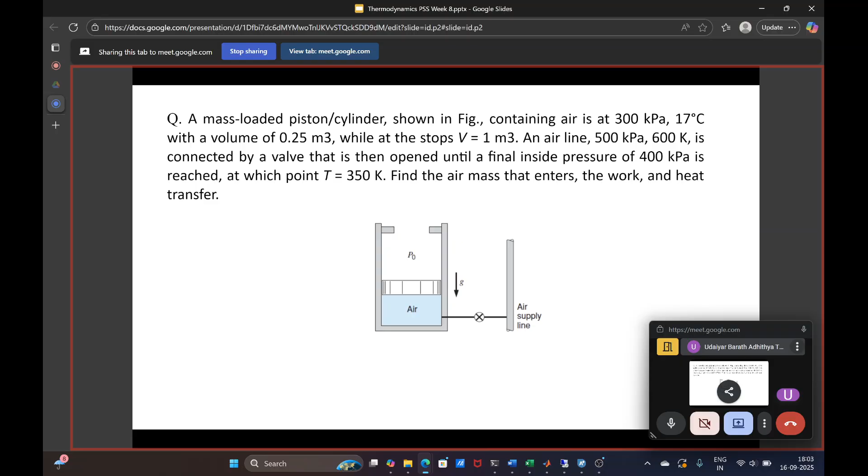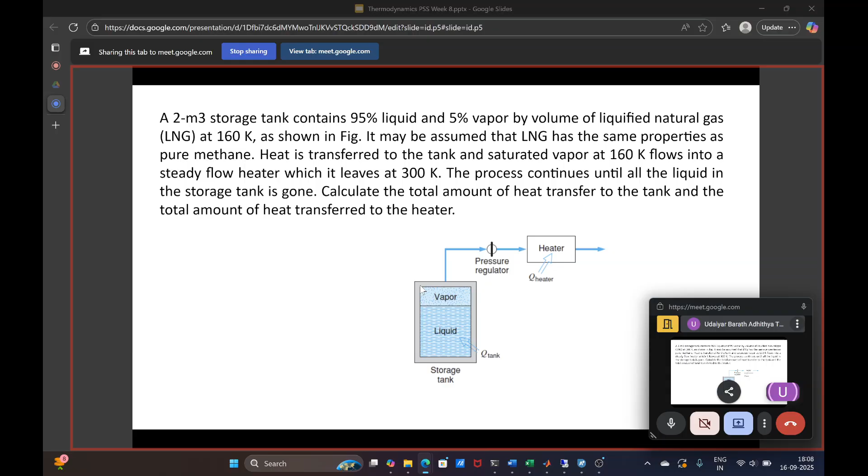And then the final mass is when it's totally saturated vapor. So the process continues until all the liquid in the storage tank is gone. That says that now the tank contains all of vapor, so the whole volume of 2 meter cube is occupied by saturated vapor LNG at 160 Kelvin.

So in that case, your mass is again 2 divided by specific volume, gives you the total mass of LNG left in the tank when it is fully occupied by vapor. That gives you 50.826 kg, so that is the final mass.

So using this, we know how much mass has exited out. So Me is 642.271 minus 50.826, which comes out to be 591.445 kilograms. So this is the amount of LNG which has evaporated and converted into saturated vapor and has left the storage tank.

So the initial internal energy is M1 U1. So initial mass we know for liquid and vapor, so the saturated liquid internal energy for liquid and saturated internal energy for vapor gives you: 639.73 is the mass of liquid present into internal energy of saturated liquid, plus mass of vapor into internal energy of saturated vapor. So that gives you the initial internal energy to be minus 67,507 kilojoule.

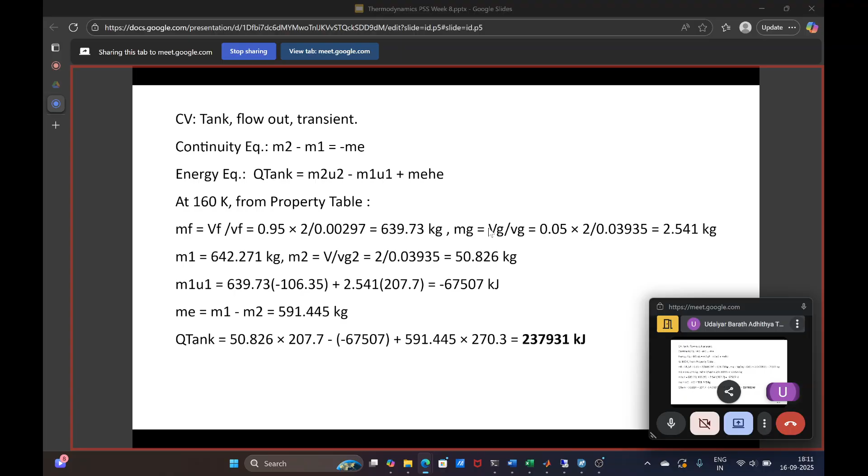So this is the pressure at which the LNG vapor, saturated vapor, is coming, and in the heater we assume there is no pressure drop, so it's a constant pressure process. So your pressure at the output also will remain the same, 1593 kilopascal, and we know that it is leaving at 300 Kelvin. So the amount of total heat supplied will be the change in enthalpy of this.

So mass into enthalpy difference, because the energy coming in is MEHI, and heat which is added with the heater equals the mass into enthalpy out. So rearranging, this is what we get: the mass of LNG leaving the tank multiplied by the enthalpy difference.

So enthalpy corresponding to 1593 kilopascal and 300 Kelvin is 612.9, and similarly 1593 kilopascal and 160 Kelvin, which is saturated vapor, is 270.3. So this gives you the heat added to be 202.629, no, 202.63 megajoules.

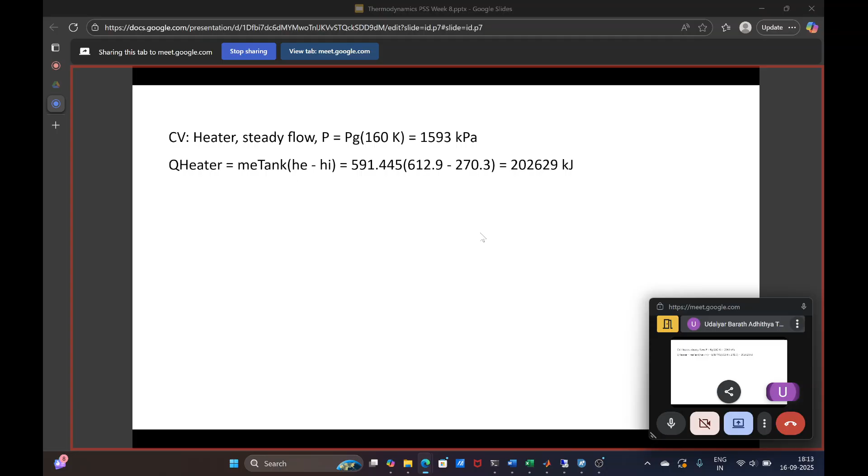Moving on to the next question.

A somewhat simplified flow diagram for a nuclear power plant is given in the figure. Mass flow rates at the various states in the cycle are shown in the accompanying table. The cycle includes a number of heaters in which heat is transferred from steam taken out of the turbine at some intermediate pressure to liquid water pumped from the condenser on its way to the steam drum. The heat exchanger in the reactor supplies 157 megawatts, and it may be assumed that there is no heat transfer in the turbine.

Part A: assume the moisture separator has no heat transfer between the two turbine sections. Determine the enthalpy and quality H4 and X4. Determine the power output of the low pressure turbine. Determine the power output of the high pressure turbine. Find the ratio of the total power output of the two turbines to the total power delivered by the reactor.

So this is the process diagram. What we have here is a reactor. We are supplying water to the reactor, it's getting heated up, and we are storing it in the steam drum. The vapor, steam, is passed to a high pressure turbine.

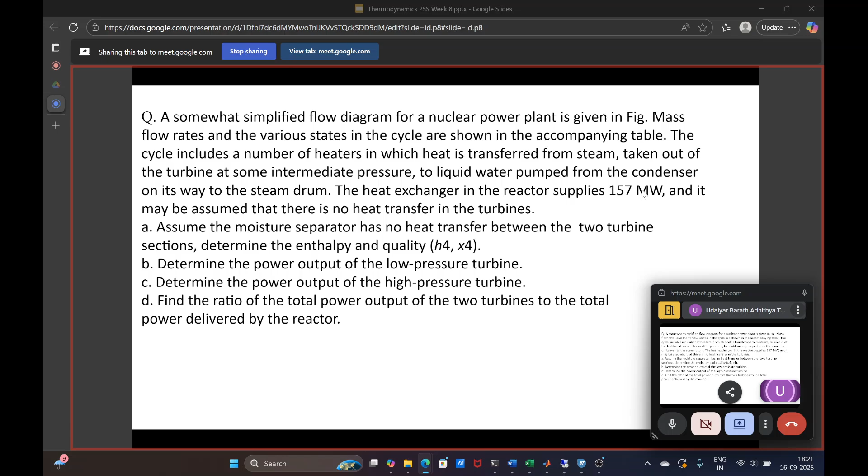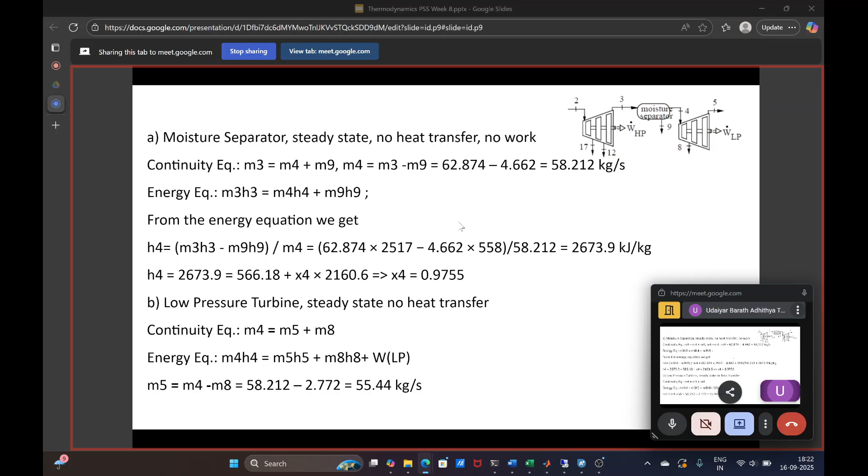The reactor is doing work by heating the steam drum, and that is given to be 157 megawatts, the amount of heat supplied by the reactor. We need to find the total work done by the two turbines divided by this heat supplied by the reactor. The low pressure turbine work output is 22.489 and the high pressure turbine is 18.394. Summing these and dividing by 157 gives an efficiency of 0.26.

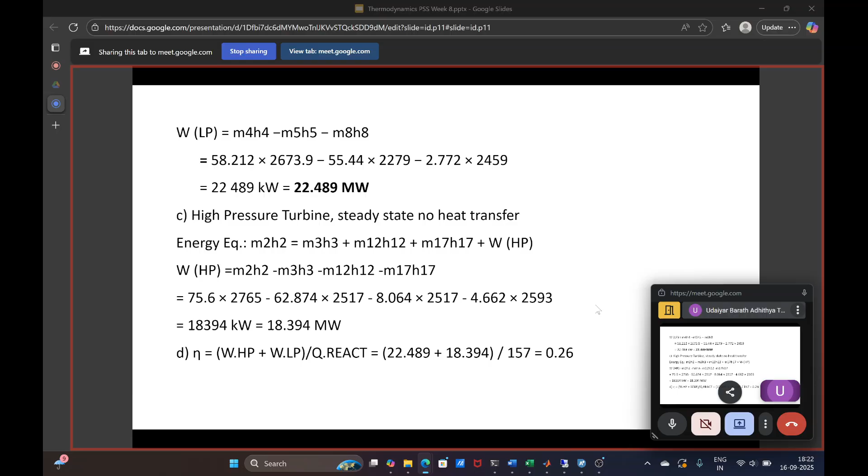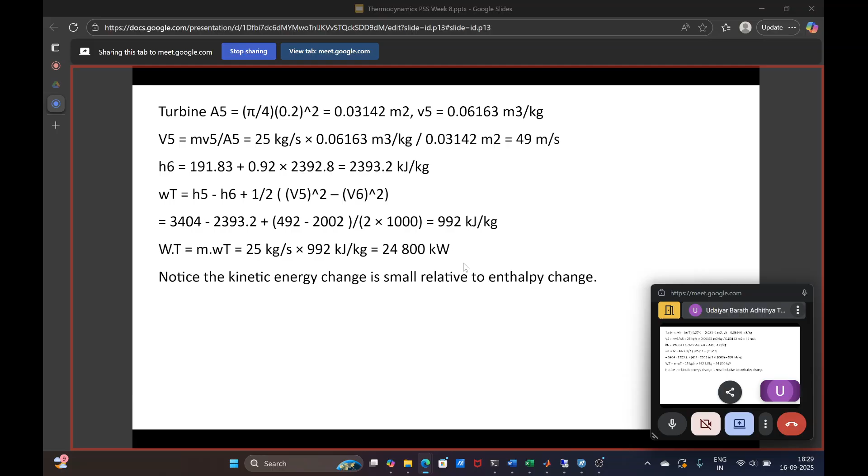So going back, you have the same steam power plant. So what is here is then the condenser. You are using water from the lake which is coming in at 15 degrees Celsius and is going out at 25 degrees Celsius. So in the process, the steam is getting cooled. So we need to find out how much mass of water is required in the condenser.

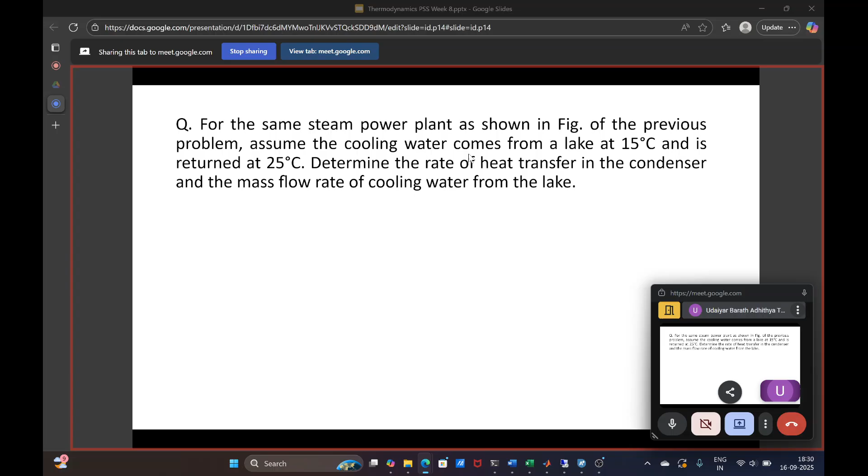So to find that, we will apply energy balance here. So we know enthalpy at 6, which you have found out, and we know enthalpy at 7, which is given at 168. And we know water, the corresponding enthalpies to the temperature, and the only unknown will be the mass. So to find that, first we'll find out what is the

velocity at the exit of the condenser. Since the diameter there is 75 mm, the area at the condenser exit is pi by 4 into 0.075 square. So that comes out to be 0.004418 meter square. And the specific volume at this point is 0.001008 meter cube per kg, and the velocity at this state is the mass into specific volume divided by the area. So that comes out to be 5.7 meters per second.

So that's a very small velocity, and we have already found out enthalpy at state 6, which is 2393.2 kilojoule per kg. So applying a control volume across the condenser and writing the first law, the energy in is going back to the problem. The energy in is m6h6, or the mass of steam into h6, and the water, cooling water coming in.

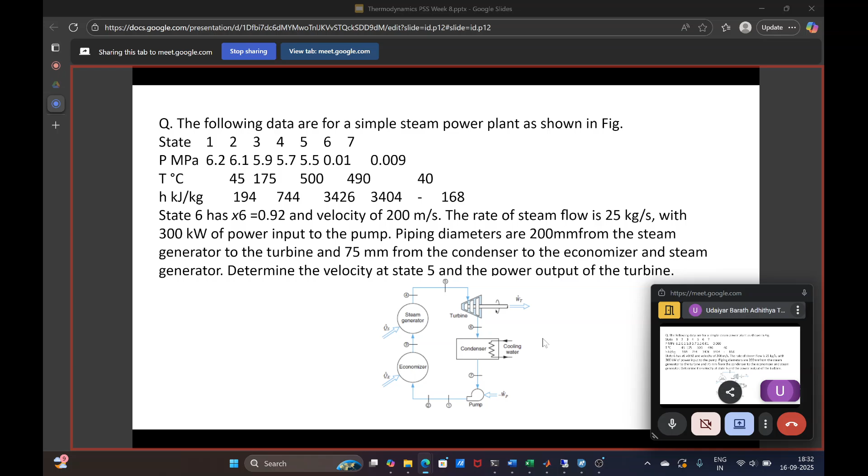So mass of water into the enthalpy of water coming in equals the mass while leaving, so m7h7, and the cooling water m water into h water leaving out. So that is the total energy balance. So to find out Q, how much heat is rejected by the steam, we can assume that some amount of heat is being rejected, which is carried by the water. So whatever heat is rejected by the steam is carried by the water.

So Q, specific heat rejected, is H7 minus H6 plus the kinetic energy term at the inlet and exit of the condenser. So H7 is 168, which is given straight away in the problem. And H6 is 2393.2, and the velocities at exit is 5.7 square minus 200 square divided by 2000, which is converted into kilojoule terms.

So what we get is Q rejected, the heat in the condenser, is minus 2245.2 kilojoules per kg. Since the mass flow rate is 25 kg per second, which is given in the problem, the total heat rejected is 25 times minus 2245.2, which comes out to be 56.13 megawatts of heat rejected in the condenser.

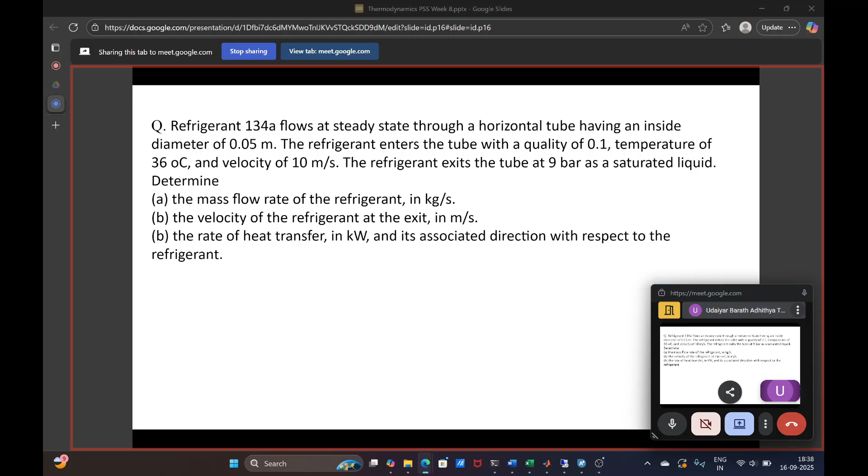So what they say is we have a horizontal tube, and at the inlet we have a two-phase mixture where the quality is 0.1, meaning 10% of it is vapor and the rest is liquid. At the exit you have saturated liquid. At the inlet, the temperature and velocity are given, and the diameter is given. We need to find the velocity at the exit, the mass flow rate of the refrigerant, and the rate of heat transfer.

So this is the problem: a tube of diameter 0.05, with the inlet and exit conditions given. The mass flow rate is A times V divided by the specific volume, where area is pi by 4 times d squared, and the velocity at inlet is known, divided by the specific volume, giving the mass flow rate.

The specific volume of the refrigerant at the inlet, since this is a two-phase case, is Vf (saturated liquid specific volume) plus X times the quality times the difference between saturated vapor and saturated liquid specific volumes. At 36 degrees Celsius, from the refrigerant property table, the saturated liquid specific volume is 8.59 times 10 power minus 4 meter cube per kg, and the saturated gas specific volume is 0.0223 meter cube per kg. Substituting these values with X as 0.1, we get the specific volume to be 0.003003 meter cube per kg.

With this, we can now find the mass flow rate. The area is pi by 4 times d squared, d is 0.05 meters, so 0.05 squared, multiplied by the velocity of 10, divided by the specific volume, which comes out to be 6.54 kilograms per second. That is the mass flow rate at the inlet.

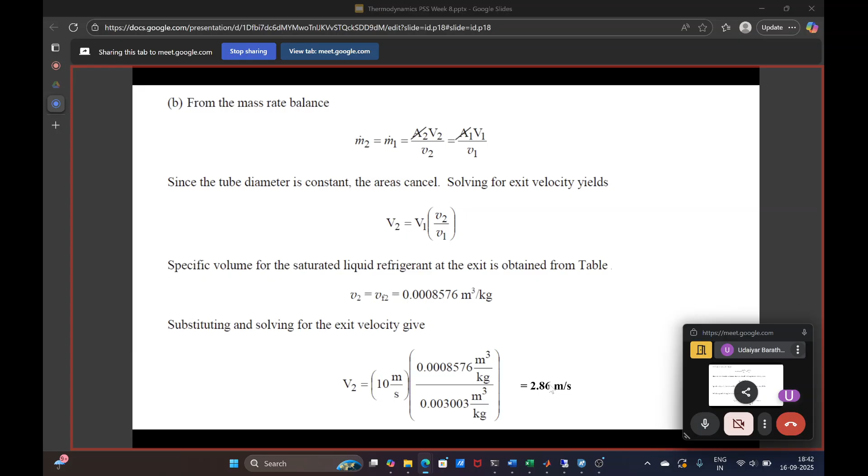So next is we need to find out how much heat is transferred. So applying an energy balance across this tube. So here energy in is the enthalpy coming in, so m dot into H1, and then which is going out is Q, and then m dot into H2, and also the kinetic energy terms.

So substituting here, this is the first law for the open system. W and potential energies are neglected. So QCV is m dot into H2 minus H1 plus half V2 square minus V1 square.

So enthalpy at inlet is Hf1 plus X1 into Hg minus Hf. Corresponding to 36 degrees Celsius, Hf and Hfg values are 100.25 and 166.15. So substituting, enthalpy at 1 will be 116.87 kilojoule per kg.

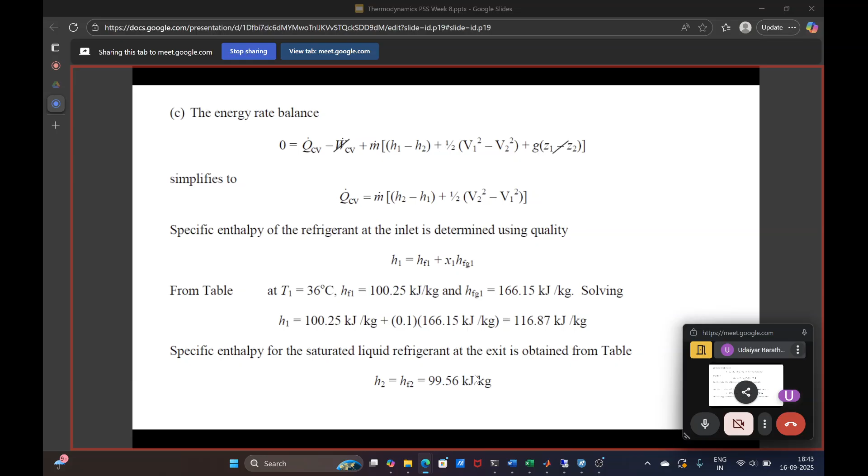And similarly specific enthalpy at saturated liquid refrigerant corresponding to 9 bar from the table is 99.56 kilojoule per kg. Substituting the values here, we get Q to be minus 113.5 kilowatts.

So Q is the difference in enthalpy and the difference in kinetic energy. That comes out to be minus 113.5 kilowatt. So this sign is negative, which says that heat is rejected to the atmosphere or the surrounding.

So enthalpy is reducing, and because of which you have to reject heat. So if you consider this as system, Q is rejected, so that's why it's negative.

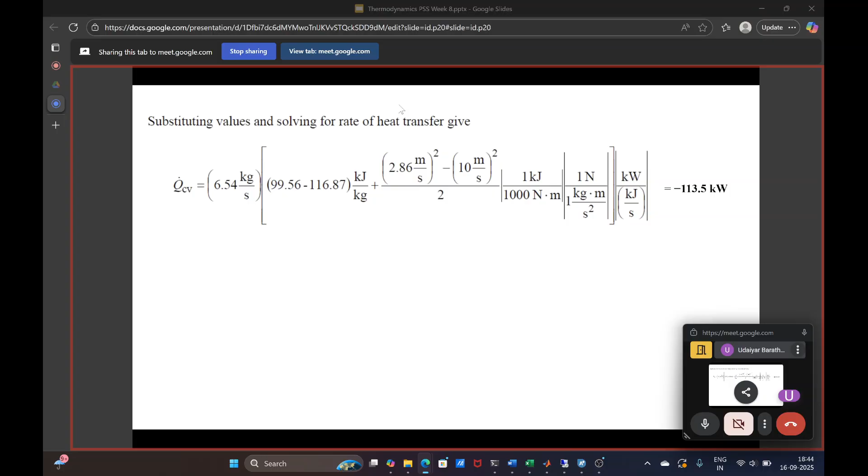So some more problems on unsteady flow problems for first law.

So there are three things which are happening. First, initially the tub is empty and the drain is closed. You're opening the tap or faucet and letting it fill for 10 minutes. Till that time your mass flow rate is 10 kg per minute coming into the tub. Then after 10 minutes the drain is opened, and at the same time you're reducing the inlet flow rate to 2 kg per minute.

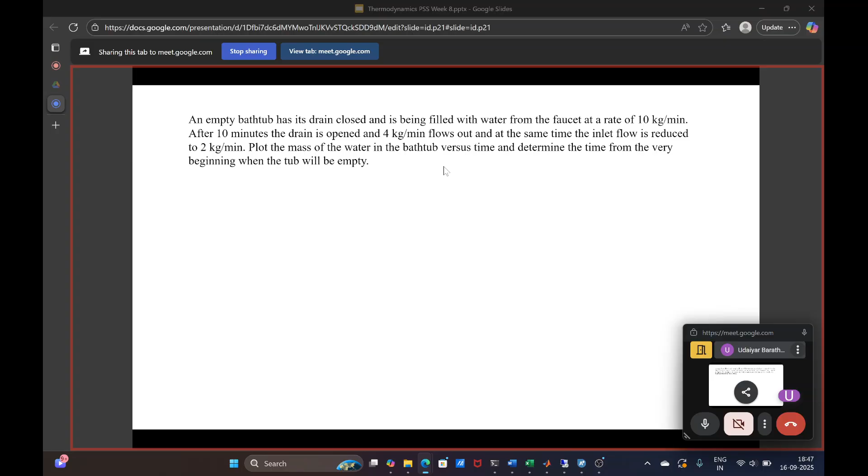So by this time there is some water filled in the bathtub, and because the drain is opened, the water is flowing out at 4 kg per minute, and the water coming in is also reduced to 2 kg per minute. So from start, at what point of time will the tub become empty? That's the question, and we need to plot how the mass is varying in the bathtub. We'll see how to solve this.

First, just like the energy balance and mass balance, we'll apply the mass balance here. The mass coming in minus the mass going out is the mass change in the system. So initially for the first 10 minutes there is no mass going out, there is only mass coming in, so whatever mass is coming in is getting accumulated in the system. The change in mass of the system is equal to the mass which is coming in.

So dmCV by dt, the rate of change of mass in the system, is the mass flow rate, which is equal to 10 kg per minute. If you integrate this, the total mass accumulated over 10 minutes is the mass flow rate into delta t, since the flow rate is constant at 10 kg per minute. So 10 kg per minute multiplied by 10 minutes gives you 100 kg. So for 10 minutes the bathtub contained 100 kg of water.

So this is how initially the mass flow will vary. Initially at time 0, and from 0 it goes up to 100 kg over 10 minutes. At this point two things are happening: one, the mass flow rate is reduced to 2 kg per minute, and the drain is open, with water flowing out of the bathtub at 4 kg per minute.

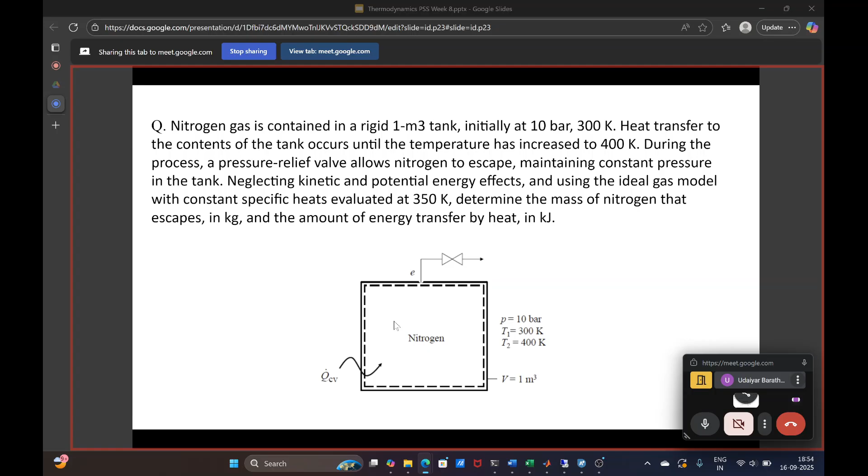So again doing a mass balance, we get the rate of change of mass in the system, dmCV by dt, equals minus m dot e, the exiting mass flow rate. Integrating, m dot cv is the integral of m dot e dt, which is equal to m1 minus m2.

Initially, m1 and m2 can be found using the ideal gas equation, PV equals mRT. So PV by R is constant since pressure and volume are constant, only the temperature is changing. So PV by R times (1 by T1 minus 1 by T2).

That comes out to be 2.808 kilograms. T1 is 300, T2 is 400. Substituting, pressure is 10 bar, volume is given as 1 meter cube. So the total mass escaping from the tank is 2.808 kilograms.

Applying energy balance again, the energy coming in minus energy going out equals the rate of change of energy in the system, that is du Cv by dt, the internal change of energy of the system, equals the energy coming in, q dot Cv, which is the heat supplied to the tank, minus the energy going out, which is carried by the nitrogen gas going out, m dot E into He.

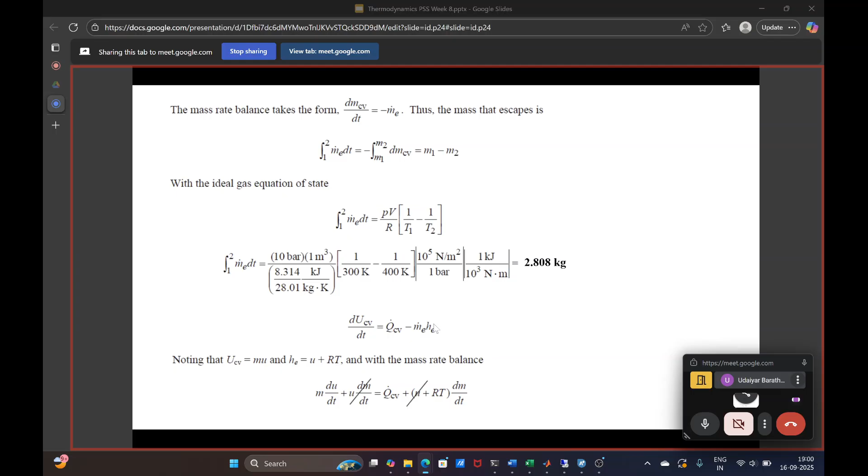So u is m dot m into u, so specific u, and then enthalpy is specific internal energy plus RT. So the u terms get cancelled out, and what is left is q equals m du by dt minus RT dm by dt.

And then what we did is expressed du as Cv dt. If you differentiate du with respect to time, we get du by dt is Cv dt by dt, because Cv is constant, we're assuming Cv is constant. So this becomes mCv dt by dt minus RT.

M can be written in terms of the ideal gas equation, PV by RT. Differentiating that with respect to time, we get PV by R multiplied by dt by minus t square, and substituting that and rearranging, this is what we get: PV multiplied by Cp divided by R into dt by t. Then integrating this, we get the total heat applied to the tank, and substituting the values, we get 1009 kilojoules.

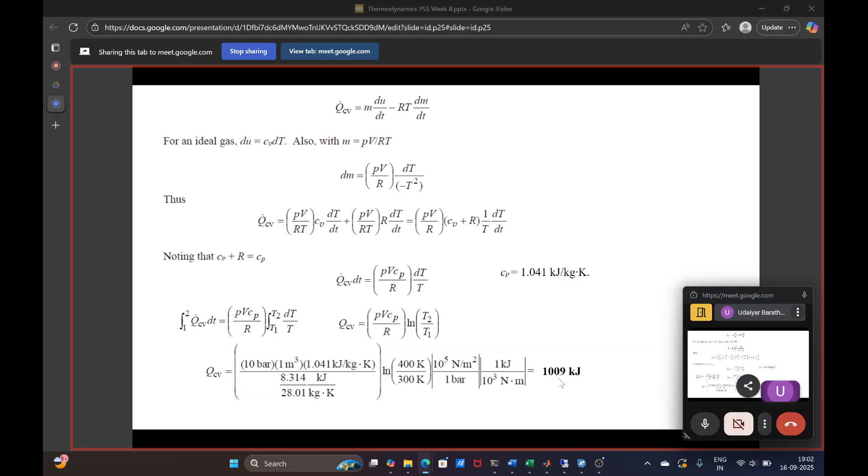So next question is: a tank containing 45 kilograms of liquid water initially at 45 degrees Celsius has one inlet and one exit with equal mass flow rates. Liquid water enters at 45 degrees Celsius and a mass flow rate of 270 kilograms per hour. A cooling coil immersed in the water removes energy at a rate of 7.6 kilowatts. The water is well mixed by a paddle wheel so that the water temperature is uniform throughout. The power input to the water from the paddle wheel is 0.6 kilowatt. The pressure at the inlet and exit are equal, and all kinetic and potential energy effects can be ignored.

Plot the variation of water temperature with time.

So what there is, you have a tank which contains water, and there is mass coming in and going out at the same mass flow rate. So whatever is there inside will remain constant, because what is coming in is going out. So whatever is staying inside, the mass will remain the same.

So for this tank, you have a cooling coil which is immersed inside, and it removes heat at a rate of 7.6 kilowatt, and this water is well mixed by a paddle wheel so that water temperature is uniform throughout. The paddle wheel energy supplied accounts for 0.6 kilowatt, and the pressure is constant throughout the tank. At the inlet and outlet the pressures are same, and kinetic and potential energy can be neglected. So we need to find out how the water temperature varies with respect to time.

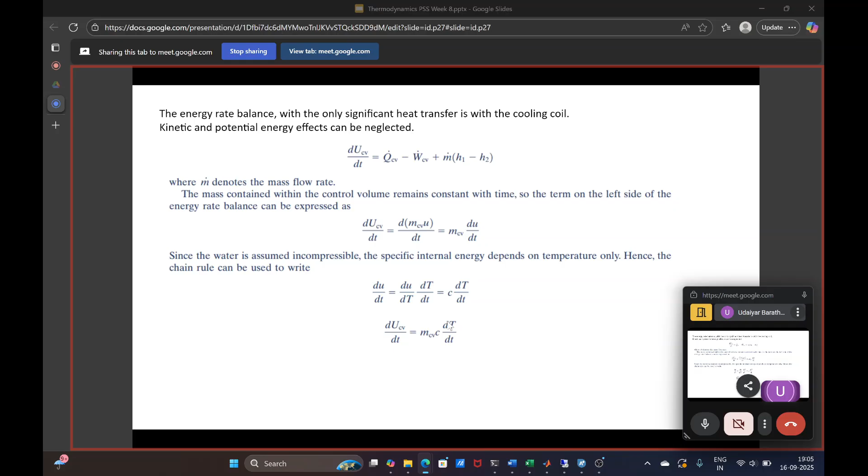This U can be written in terms of mass into specific internal energy. Since the mass of the control volume is not changing, dm_cv/dt is 0. So what we have is m_cv times du/dt, and du/dt can be written as du/dT times dT/dt, the change of temperature with respect to time. And du/dT is nothing but Cv.

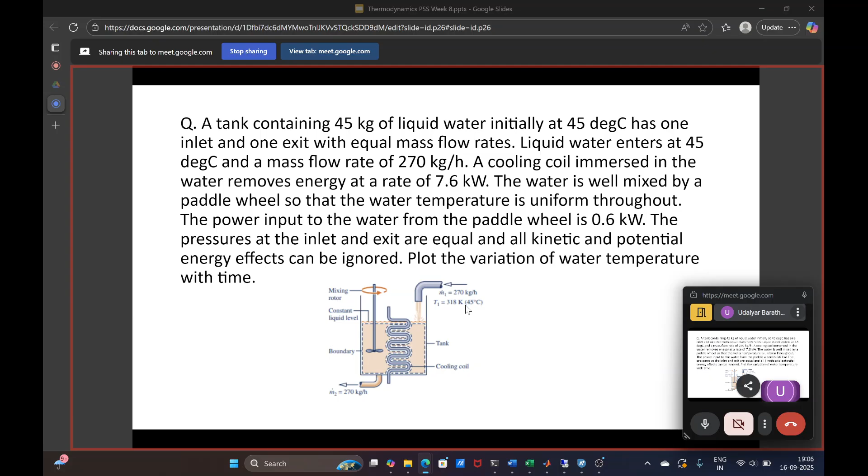So dU_cv/dt is m_cv times Cv multiplied by the rate of change of temperature with respect to time. Substituting this, we get mass of control volume times Cv times dT/dt equals Q minus W plus m dot Cv times (T1 minus T), because the inlet temperature remains constant at 45 degrees Celsius and the outlet temperature varies with respect to time until it reaches steady state.

Where the temperature remains constant later on. So initially the bulk of the mass of liquid has to be cooled down, that's why you initially see a drop in temperature, and it's varying, and after some time the temperature will remain constant. Now integrating this, we get temperature to be C1 exponential of (minus m dot over m_cv times Cv, times time) plus (Q dot minus W_cv) over (m dot Cv) plus T1. So this is the temperature expression which we get. At t equal to 0, T will be T1, and the final expression is this.

Just substituting the values here: Q is 7.6, W is 0.6, so minus 7.6 minus 0.6, divided by m dot C, where 270 kilograms per hour divided by 3600, and Cp for liquid is 4.2. Substituting, we get temperature to be 318 minus 22 multiplied by (1 minus exponential of minus 6t).

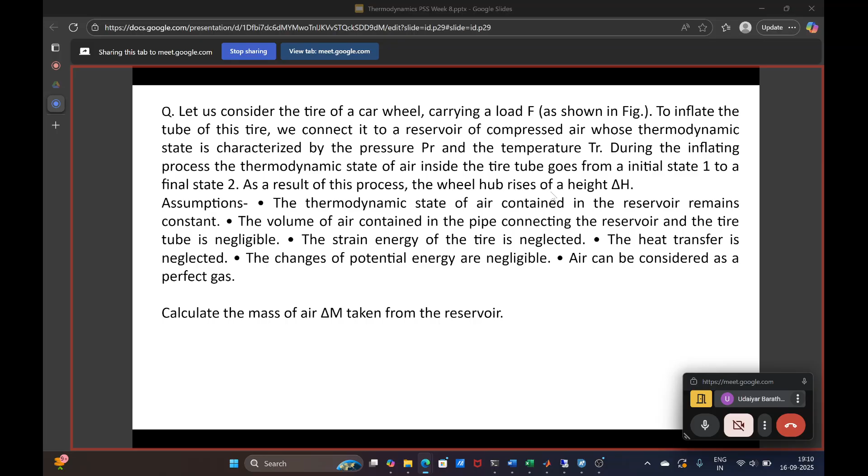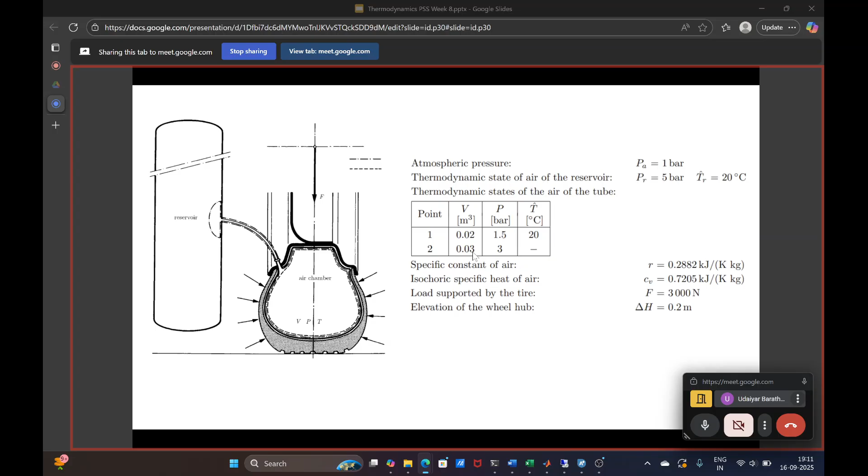After filling, the hub rises by a height of delta h, which is 0.2 meter. The load applied on the tire is 3000 Newton, and CV and R values are given, and the reservoir pressure is 5 bar and temperature is 20 degrees Celsius. The atmospheric pressure is 1 bar, and the tire initial and final state volumes are given: 0.02, pressure 1.5, and temperature 20; finally 0.03, pressure is 3, and temperature is not known.

So during state 1 and 2 the air is getting filled, state 1 and 2 being the initial and final states.

Applying the first law, we get delta U equals some work done plus the change in M2 minus M1 into the enthalpy HR.

So delta U, the change in energy of the system, equals Q. This is just the first law expression: dU by dt equals Q minus W plus M in minus M out. So the expression we get is W, M2 minus M1 into HR.

So the work received by the system has two components: one is the change in potential energy, and this is the same approach as the similar problem - work equals system plus surrounding. So the work in inflating this tire is, first, raising the potential energy of the force acting on the hub, and second, the work done against the atmosphere, which is exerting constant atmospheric pressure PA.

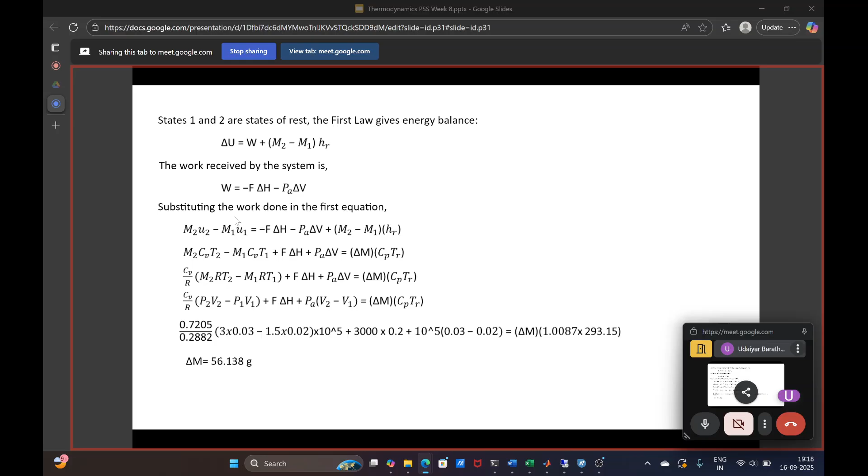So final question for today: steam enters a turbine with a pressure of 30 bar, a temperature of 400 degrees Celsius, and a velocity of 160 meters per second. Saturated vapor at 100 degrees Celsius exits with a velocity of 100 meters per second. At steady state, the turbine develops work equal to 540 kilojoule per kg of steam flowing through the turbine. Heat transfer between the turbine and its surroundings occurs at an average outer surface temperature of 350 Kelvin. Determine the rate at which entropy is produced within the turbine.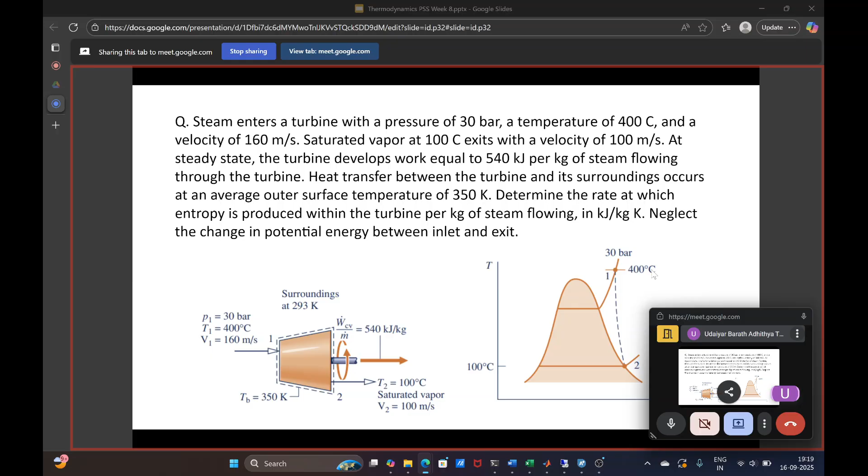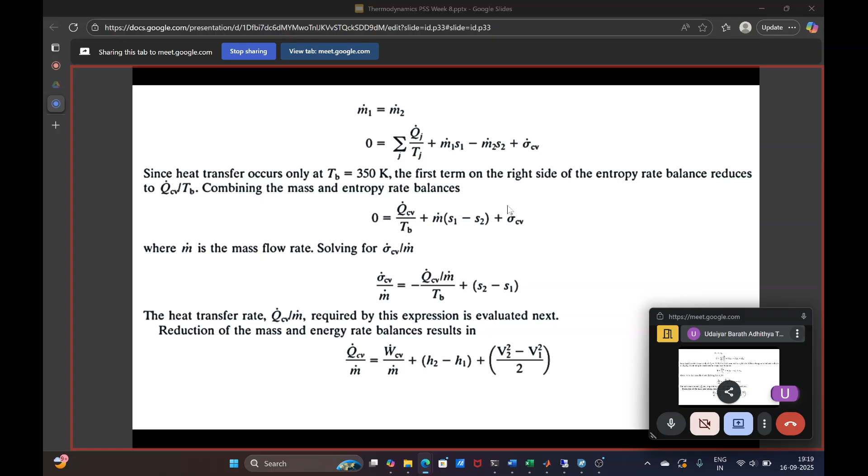I think it's better to see it in the next class, this one on entropy. So this is the final problem for today.

We have two heat engines which operate between the same two energy reservoirs, and both receive the same QH. One engine is reversible and the other is not. What can you say about the two QL which is rejected to the lower energy reservoir? So what is there is you get the same amount of heat for two engines, but one engine is reversible and the other is irreversible. So what can you say about the heat rejected in both engines? What we know is one is reversible, and reversible engines are the most efficient engines of all the engines which you can develop.

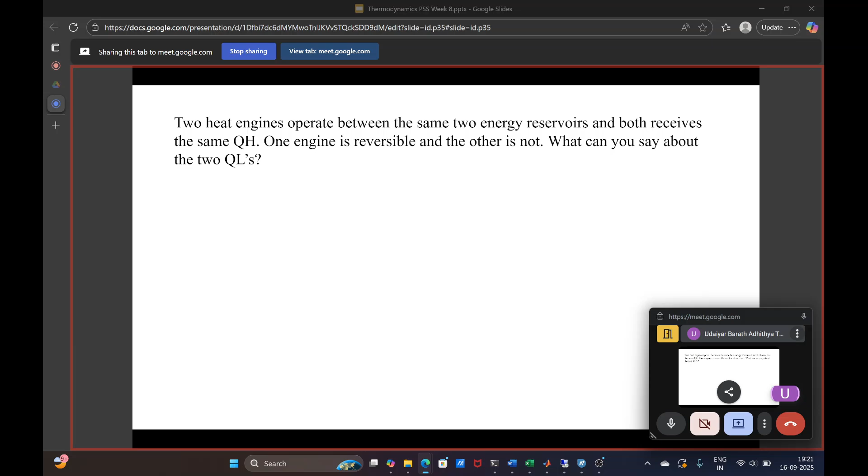So the reversible engine will be more efficient, so it will generate more work. If you apply the first law, Q which is coming in minus Q which is going out will be equal to the work done. So if work done is maximum and both receive the same Q, the Q rejected will be lower in case of the reversible engine, and the Q rejected will be higher in case of the one which is not reversible.

So the reversible heat engine can produce more work and has higher efficiency than the irreversible heat engine, and because of energy conservation, we get W reversible is QH minus QL reversible, which states that work reversible is always greater than work produced in the irreversible engine. So rearranging, QL reversible is less than QL irreversible.

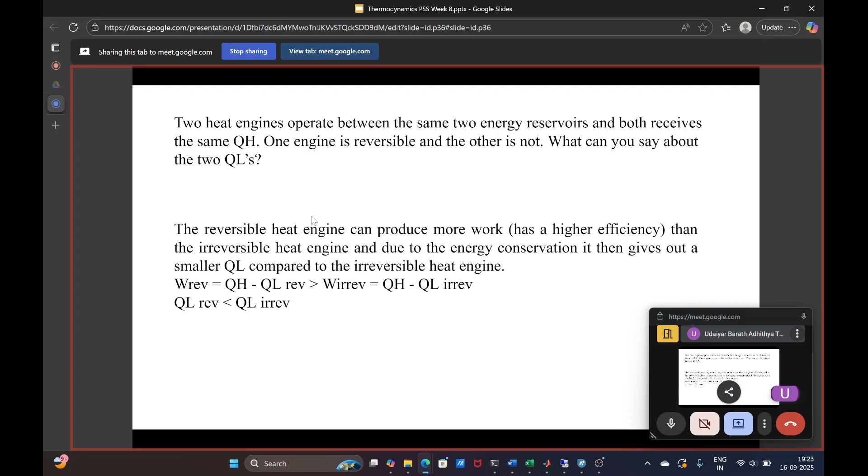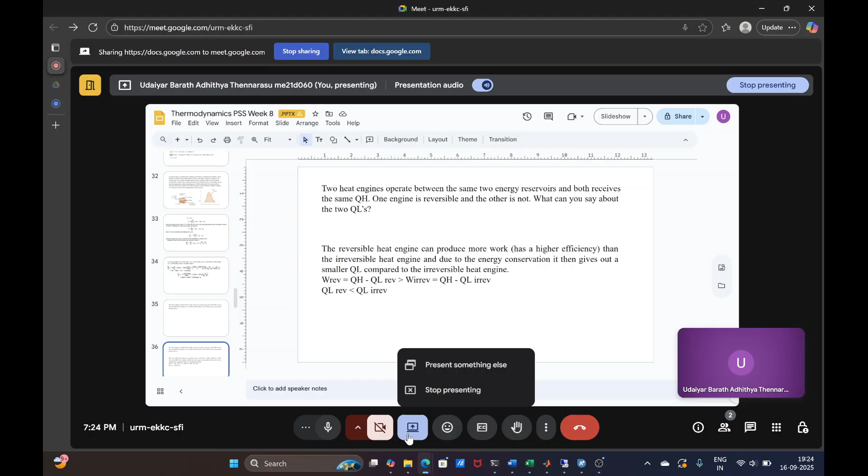So that's all for today. We have finished the problems which I prepared for today. We have covered problems on first law, and we have started with some problems on second law. We'll see some more problems of second law in the next week. In the first law we covered all kinds of components, and for a process or multiple components, how it's applied, and how you apply for unsteady cases, how you apply mass balance and energy balance. That's what we looked at for first law for open systems. And then we also discussed the second law statements, gave a brief idea on those, and started with a problem on second law. So we'll look at more problems in the next week for second law systems.